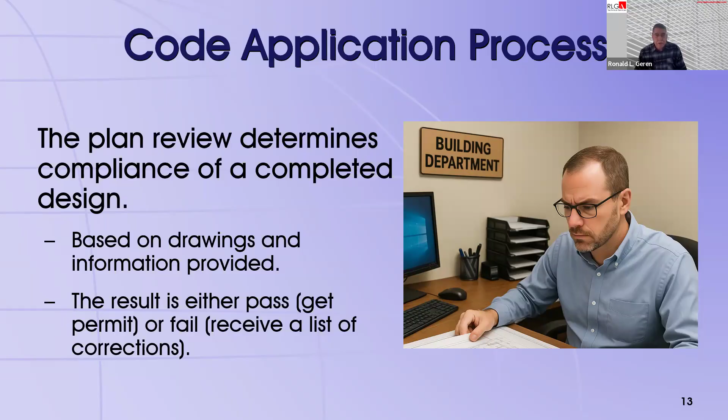So in this design process, the best solution is to create what I call a code compliance strategy. You're working off of minimal information. The only information that you really have, especially at the beginning of the project, is that programming document that the owner gave you. And in some cases, the additional service that you're required to provide for the owner is to develop that program for them.

So even then, you're starting with zero information at that point, other than you have a pretty good idea what the project is. From a macro perspective, you know it's either going to be an office building, a hospital, or a school, or whatever. So you have some general idea of what you're starting with. But you're really starting with minimal information. And then how that code applies really depends on the tactics that you as designers take along that process in order to address specific code issues; room sizes, materials, cost is going to affect that. So there's a lot of things that play into the code application process.

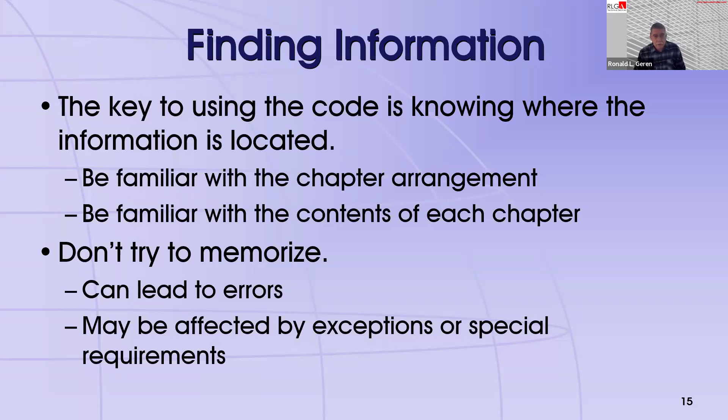Another thing to know is to understand your definitions. What you may think is a correct definition is not really what the building code thinks that definition is. So, for example, the word approved. If you ask somebody if something was approved, you would ask by whom? Is it the jurisdiction? Is it the architect? Is it the contractor? If the code says it has to be approved by somebody, who is that approving authority?

Well, if you go into the IBC and look up the definition of the word approved, it says acceptable to the building official. So if you want to use a product and the code says or any other approved material, it gives you a prescriptive requirement and then says any approved material. If you want to use something other than what the prescriptive material is, you have to go to the building official to get that approval.

Some jurisdictions like California and Florida have approval systems already in place, so you can go and take a look at their listing to see if something's already been approved for those particular jurisdictions. If not, then you'll have to go through the approval process. For those of us outside of California and Florida, where they have those, and I'm sure there's some other jurisdictions out there that have similar situations.

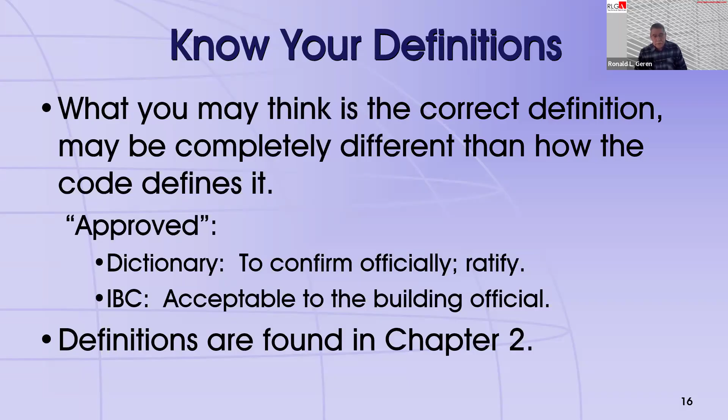Even the headers there for the four parts of the means of egress system. Means of egress is defined, and it's defined as being the exit access, the exit, the exit discharge, and the public way. And so each of those have various components, and each of those components are defined terms if they're italicized in that list. So anytime the IBC italicizes a word or a series of words, that means those are defined somewhere in Chapter 2.

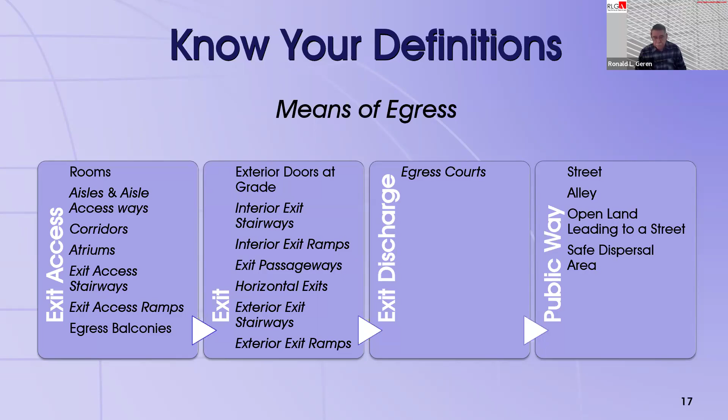So let's get into the step-by-step process. It's a 28-step process. I tried to make it a 12-step process when I first started, so I could say this is my 12-step process for code application for architects. And somebody told me it was a good thing I didn't do that, because all the 12-step organizations out there could have sued me for copyright. So it's a 28-step process.

Yes, it's a little bit daunting, but it's actually turned out to be necessary to have these individual steps. Schematic design almost includes 50% of them. And that's because there is so much that happens early on in the project design that you have to make some significant code decisions that affect the design later on. So many of these decisions that you make during schematic design, you want to make sure that you make them during schematic design, because if you hold off until design development, or even worse, construction documents, you may find yourself going back to the drawing board and redoing either the whole building or a good portion of the building.

And if you're hired to do programming, some of those steps can be done during the programming phase, just based off the programming areas that you're going to be given by your client. Design development has 8 steps within that, and those 8 steps get into more detail on the design itself, just like design development is intended to be. You want to start putting muscle and meat on the skeletal frame that we constructed in schematic design. And then construction documents has 7 steps, and it's basically detailing everything based on the selected material and construction type that you're building the building for.

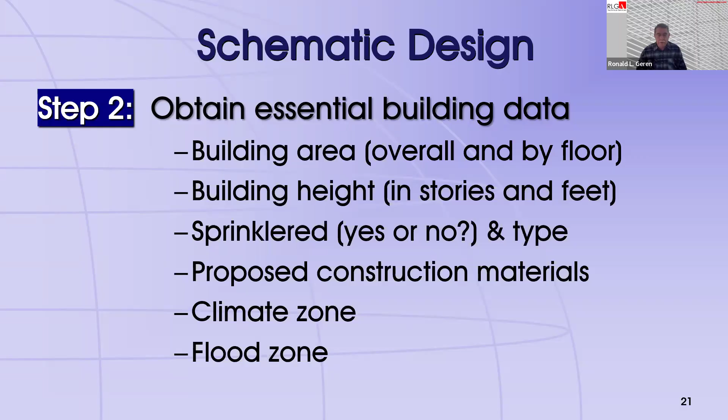Another consideration is what kind of materials do you want to use on the project? Are you going to be wood frame, concrete, whatever? Put some thoughts together, because that'll point you in the direction when we come to determining construction type. Then determine what your climate zone is, because that's going to dictate your building thermal envelope elements. And then your flood zone, whether or not you're in a floodplain, a 100-year floodplain. If you are, there are certain things you're going to have to do to address that flood elevation level.

The next step, based on that programming document, is to determine what the occupancy groups are. In most cases, buildings are going to be multiple occupancy. So you want to look at all elements of the building to determine what the various occupancy groups are going to be. Obviously there's probably going to be one major occupancy group, and in rare occasions you may have a single occupancy building, but in most cases buildings will have multiple occupancies. So look at Chapter 3 and go through that to determine what your occupancy groups are.

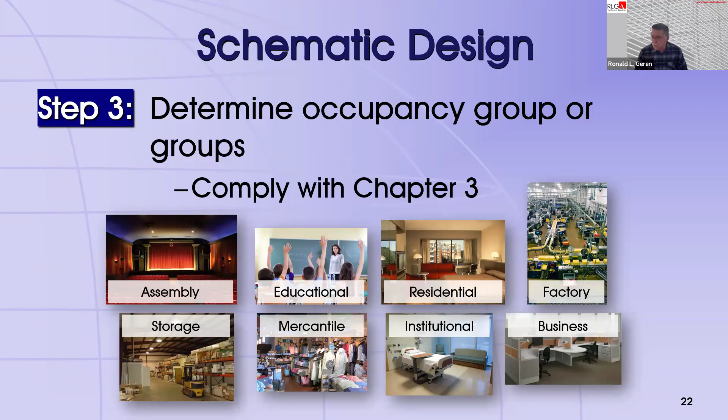Step 4 is to take a look at your construction type based on the materials you decided you want to build or design your building with. There are 5 construction types. Type 1 and 2 are considered non-combustible, while type 3, 4, and 5 are considered combustible. With each one of those comes certain fire resistant requirements for certain building elements, so you need to look at Chapter 6 regarding what type of fire resistance is required. The type of materials affects the allowable area and allowable height—or I should say the construction type will determine the building area and allowable height.

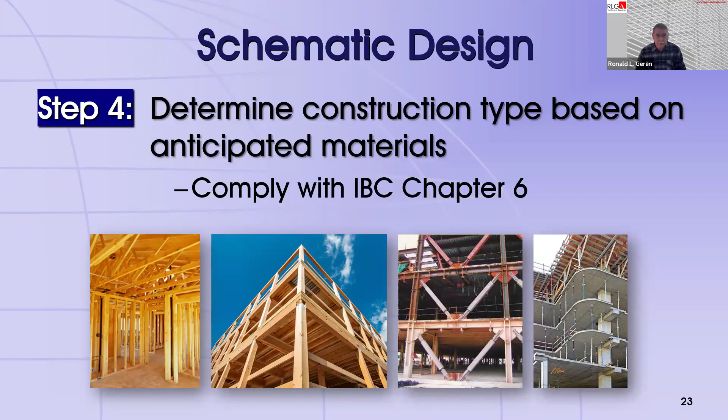Something to keep in mind is that under the 2021 IBC, they introduced 3 new Type 4 constructions for tall wood buildings. So those are new in the 2021 IBC.

Step 5 is to determine how mixed uses and occupancies will be handled. This is the situation I just talked about where most buildings are going to be what we call mixed use, with more than one occupancy group present in that building. How you handle that, you have options—this is part of your code compliance strategy. You can consider them accessory occupancies, provided they don't exceed more than 10% of the floor area in which they're located. That's the aggregate sum, not just 10% of one occupancy and 10% of another. You have to take all the accessory occupancies, total up the entire area of all of those, and if it's less than 10% of the floor area, you can call it an accessory occupancy with no separation. You still have to classify them according to their occupancy group, but they do not dictate allowable area or height.

Another option, if you can't call it an accessory occupancy, is to call it a non-separated occupancy. A non-separated occupancy means you have multiple occupancy groups, and table 508.4—I can't remember the exact number now—identifies what the required firewall or fire separation requirements are between occupancy groups. With a non-separated occupancy, you don't provide any separation between the occupancy groups, but everything is dictated by the occupancy group that is most restrictive in regards to height and area.

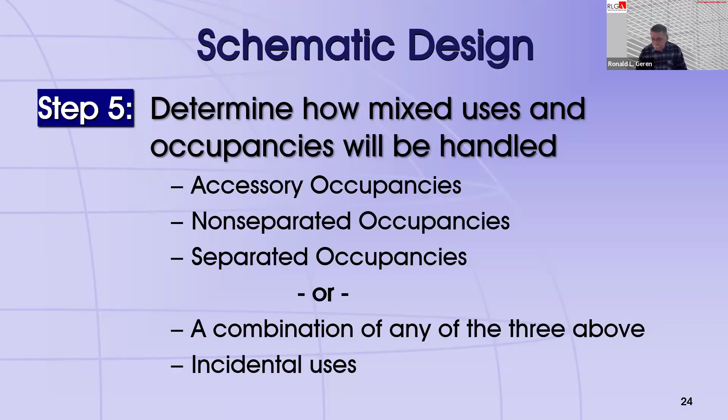So this is when I was talking about special uses. Even though you've classified the building under Chapter 3 for an occupancy group, in some cases you may have a building that is kind of unique within that occupancy group that you have to apply additional requirements to. Some of the more common ones are shown there, but I'm going to go through the entire list - it's actually 3 slides worth of special uses and occupancies addressed in this particular chapter.

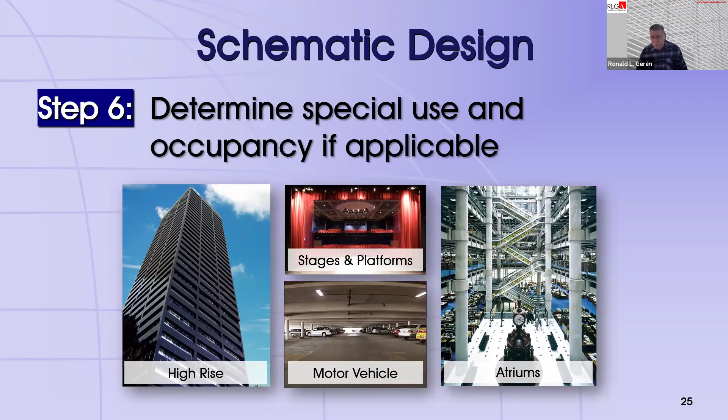So you got covered mall and open mall buildings, high-rise buildings, atriums - those things you'll probably run into on a rather regular occasion. Underground building is any building with the floor more than 30 feet below the grade plane. Motor vehicle related - this is your parking garages, open or enclosed parking garages, private garages, public garages, and then vehicle repair shops. Group I2, your hospitals. Group I3, your prisons and detainment centers.

Motion picture projection rooms - it's becoming less and less of a problem in this digital age, since most of our movie theaters are going digital rather than film. The problem was the cellulose film is very flammable, and you had a lot of fires - flammable film with projectors with high heat light bulbs, not a good combination. A lot of fires started in the projector rooms. And then stages, platforms, and technical production areas - the scaffolding and everything associated with production type facilities.

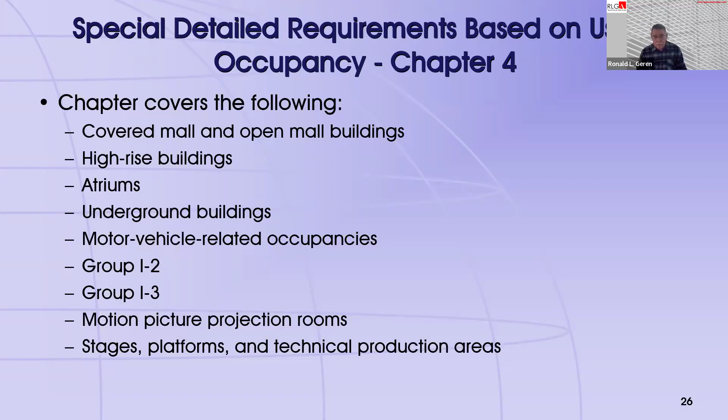Special amusement areas - this is where Disney lives in. Aircraft related occupancies, hangars, that type of thing, aircraft painting hangars. Combustible storage, hazardous materials - whether or not you're a Group H building or not, if you have combustible materials or hazardous materials, you still have to follow this particular section in Chapter 4.

And then the next one that gets into the Group H high hazard occupancy groups - spray application of flammable finishes, drying rooms, artificial decorative vegetation, which is kind of important if anybody's familiar with the Coconut Grove fire, I believe in Boston. That was all started because of decorative vegetation in the dance room.

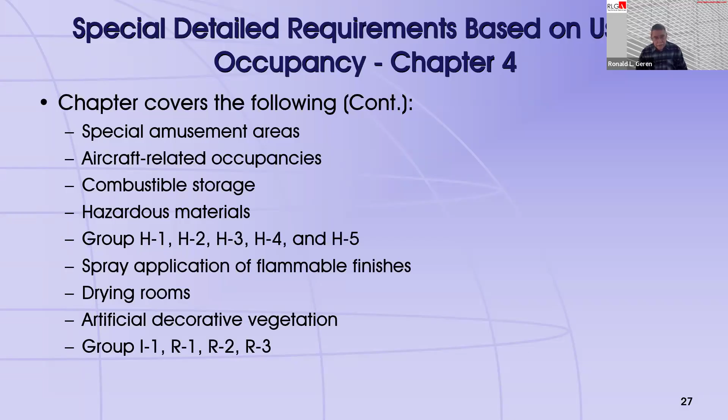And then special occupancies for residential - Group I1, which is your residential care homes, R1, R2, and R3 is your hotel motels, apartments, and single family detached or duplex dwelling units, respectively.

And then some things that you may or may not get into, these are getting less and less common - hydrogen fuel gas rooms, ambulatory care facilities you may run into on occasion, storm shelters especially if you're in the Midwest for tornadoes. Play structures used to be called children play structures - now we've got play structures for adults too, so they just took out the children. Hyperbaric facilities, combustible dust, grain processing - so it's mostly agricultural there. And then if you're into higher ed or healthcare, medical gas systems, and then higher education laboratories.

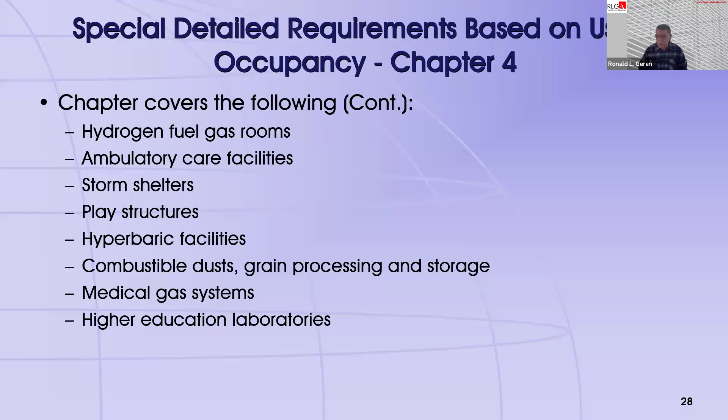A lot within that one single chapter.

Next step, step 7, is to determine your allowable height and area. This depends on whether you're doing a separation of occupancies, because you can separate occupancies by horizontal assembly and in the vertical instance. So if one occupancy allows you to go higher and another has a low story height, you separate it, put the low story height at the lower floors and continue up with the higher height occupancy group, separated by horizontal assembly. It really depends upon the separation of the occupancy.

Tables 504.3 and 504.4 talk about heights. One is based on stories, the other based on feet, and it's mostly dictated by construction type, but occupancy group also plays a factor. The allowable areas are what we call tabulated areas in 506.2. It used to be these were all congregated into a single table, 503, with the exception of heights in feet, and they separated these. It made a difference, but kind of did not, in my opinion.

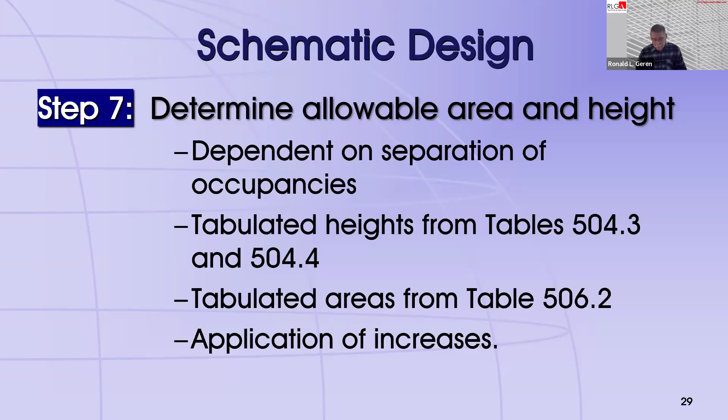So if you find yourself in a situation where you've gone through the whole process up to this point and your building either exceeds allowable height or exceeds allowable area, what are some things you can do? One option is to just go to a higher construction type. If you're type 5, go to 4 or 3, or maybe even jump to 2B, which is a non-fire resistance rated, non-combustible building. That'll give you more allowable area and height in some cases, so that may be enough of a jump to get you where you need to be.

Another option, if you don't want to go to a higher construction type, is to break your building up into smaller buildings using firewalls. Although each building separated by a firewall is treated separately in regards to area and height, the whole building is still considered a single building for purposes of electrical supply, power supply, and things like that.

Fire lines going into the building for the sprinkler systems, things like that. So it's still treated as a single building, but for purposes of height and area, it's multiple buildings.

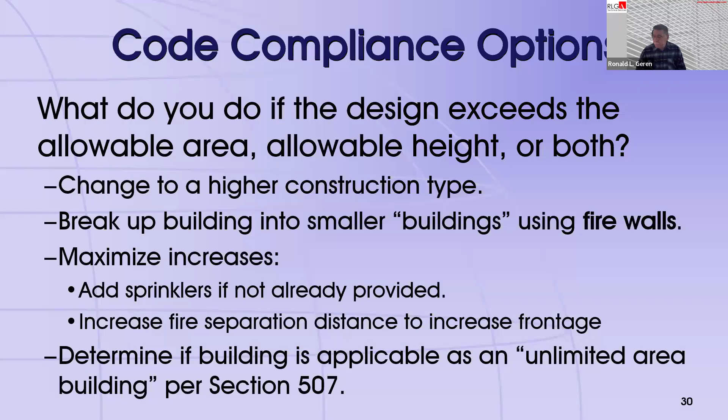Next step is to calculate your occupant load, and this is going to be based on your preliminary floor areas at this stage, unless you already have a floor plan. But if you don't, you can still calculate it based off the program areas and get a rough order of what your occupant load is going to be.

And then you're going to keep coming back and readdressing this over and over again as the design develops, and that may either tighten or increase. So you have to be very aware of what you're doing when you're manipulating spaces during the design process.

The reason why this is so important is because that number, whatever occupant load you come up with, is going to be used to determine the number of exits required for the building, what your exit width requirements are going to be, and the number of plumbing fixtures that you're going to have in that building.

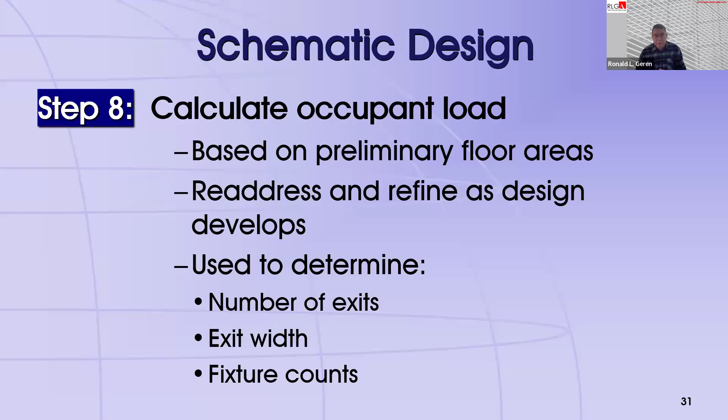Step 9 is to establish points of exit. Everything is—I tell my students this—2 exits, regardless. Provide me 2 exits. Then you have to take a look at the table to see if you need to go higher. Most buildings, unless it's an assembly building, are probably going to be less than 500 occupants per story, and all you need is 2 exits.

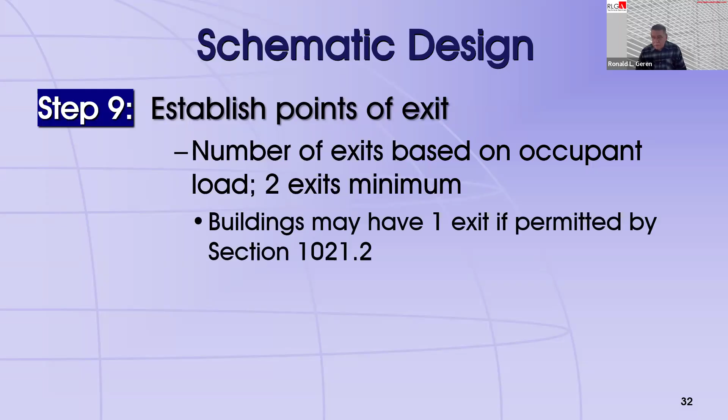Anything higher than that, 501 to 1,000, you're required to have 3 exits, and anything over 1,000, 4 exits. You may be permitted 1 exit if permitted by section 1021.2.

When you're required to have at least 2 or more exits, at least 2 of those exits have to be separated by 1/2 the overall diagonal if it's unsprinklered, or 1/3 the overall diagonal of that area being egressed for a sprinkler system. So 1/2 the overall diagonal of that space non-sprinklered, 1/3 the overall diagonal for buildings that are sprinklered. That's the separation between at least 2 exits. Not all 3 or all 4 exits have to be separated by that distance, but at least 2 of them do.

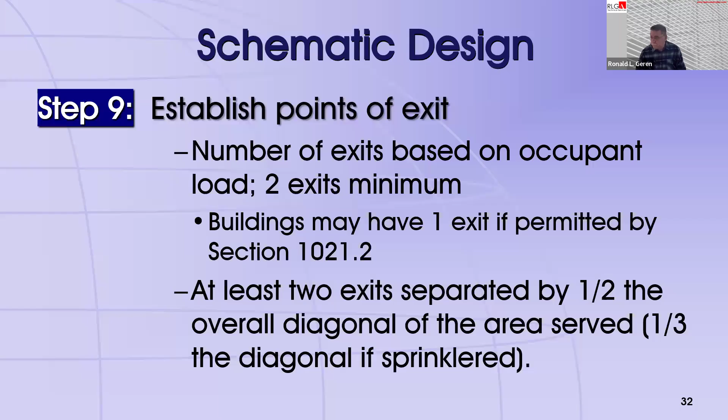Next is to check your egress pathways. So now you've got your building layout, you've identified where your exits are. You want to make sure that your pathways to those exits meet certain requirements. So you want to look for what the travel distances are. Measure from the most remote point in each room to an exit, and that distance must be less than or equal to the travel distance allowed by the code. That's all in Chapter 10.

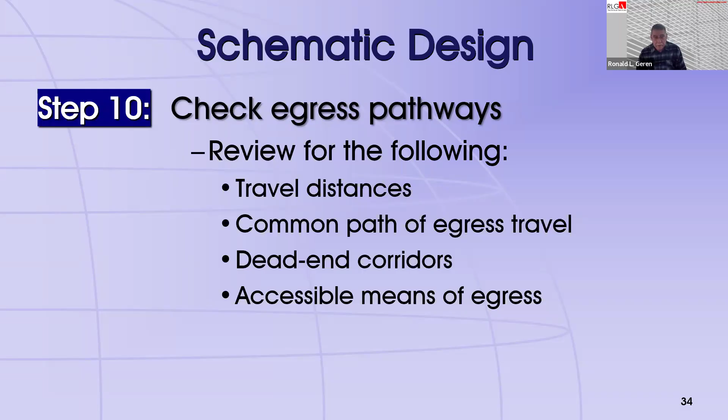So the exit access is where the pathways are, and this kind of starts in the room. In most cases, there may be certain open stairs, or unenclosed exit access stairs, that go between the second and third floor but don't continue all the way down to the ground. Those are considered exit access stairs; they cannot be called exits. Egress balconies, balconies on the outside, like if you're familiar with a lot of motels where the entrances are on the outside and you've got those balconies that connect all the doorways. Some apartment complexes are like that as well.

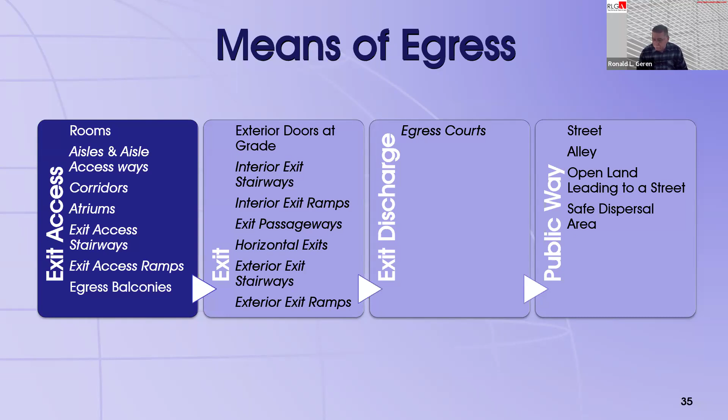So travel distance and measuring from the most remote point - I didn't want to get too technical, but I want to point this out because this is something I see frequently. The reason why we measure travel distance the way we do is because of this: most rooms are going to have a series of furnishings in it, so to go from the most remote point in that room to that doorway on the opposite corner, you're going to have to do a zigzag pattern through all the furnishings. You cannot do this. I see a lot of diagrams that come across my desk from architects wanting me to review their drawings, and I see this, and I tell them, no, you can't do that.

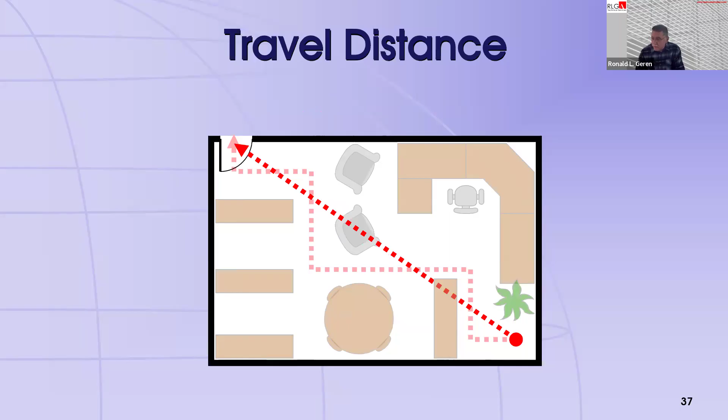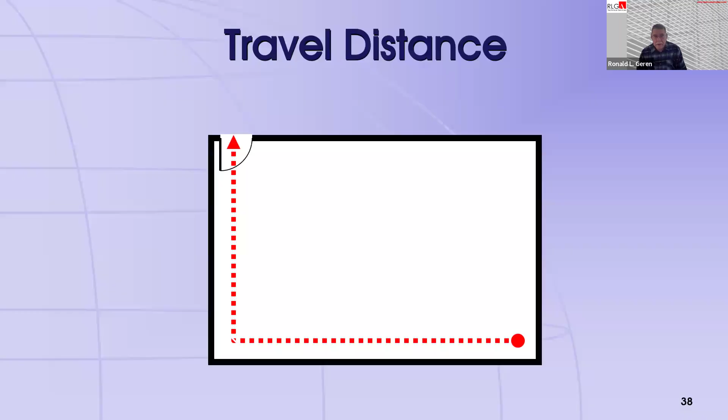If you took the dimension here and looked at that dimension there, that distance, it would be the same. So if you follow an orthogonal path to the exit, that'll maximize the travel distance to that particular exit access door or exit door.

Step 11, determine fixture counts. It could be very complex. I can speak for at least an hour, hour and a half on determining fixture counts. Again, this is going to be based on that occupant load that we calculated back in step 8. And this is going to be broken down by classification. They don't call it occupancy group anymore. It used to be under occupancy group.

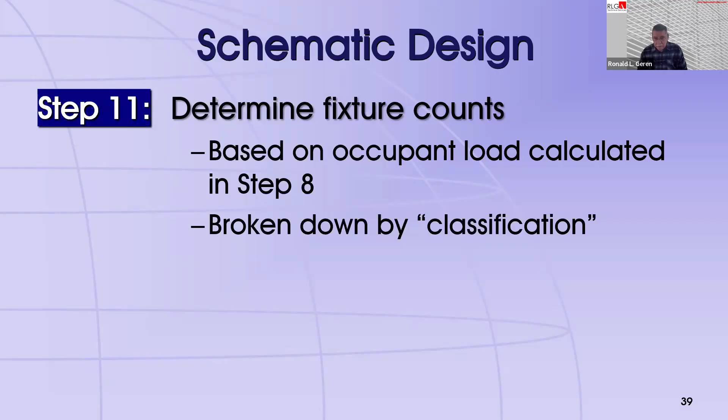So now you can kind of group certain areas of buildings, even though they may be classified as a certain occupancy group. You can put them together under a single classification and group them that way because they're all associated with that main occupancy or that main use, and just apply it as an umbrella calculation to cover the entire area. But those fixture counts, you have to deal with it 50-50, 50 male, 50 female, and you have to provide fixtures in accordance with the table.

They are allowing single use or single user toilet rooms grouped together for non-gender specific application. However, the total number of fixtures still have to add up to the requirement for male and female. So if you're required to have 4 water closets for males, 5 water closets for females, if you want to lump them together and make them non-gender specific, you have to provide 9 water closets that anybody can use. And they all be in individual toilet rooms, and then you can have congregate lavatories on the outside, same calculation, same number of fixtures based on both calculations.

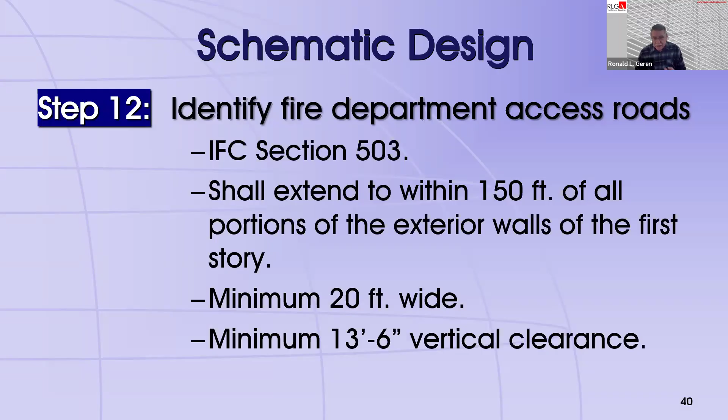Step 12 is identify your fire department access roads. Here you have to go to IFC section 503, so you have to look at the fire code. In this instance, if they adopted Appendix D of the IFC, then that gives you some further criteria about turnarounds and things like that. Otherwise, your fire department may have specific criteria in lieu of an Appendix D. The fire access road must be within 150 feet of all portions of the exterior walls at the first floor. The road must be at least 20 feet wide and have a 13-foot, 6-inch vertical clearance.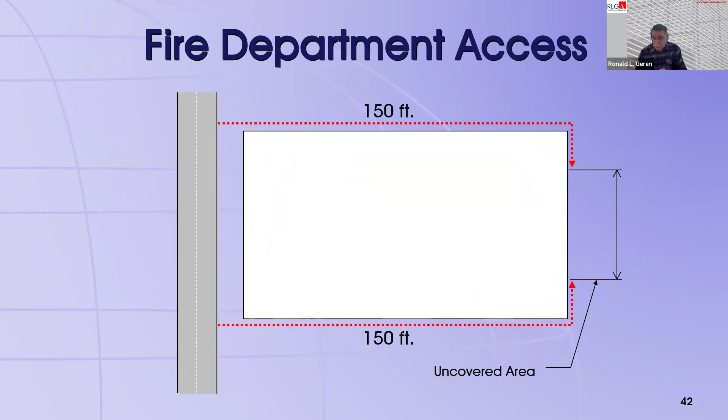So when we say 150 feet from the fire lane, this is not what we're talking about. Draw an arc, yeah, everything's within 150 feet. No, this is what they mean. You have to go from the road around the perimeter. And if you go around and find yourself short, you're going to have to make that up with a fire lane. And you can do that by increasing the fire lane, adding a fire lane to cover the gap, or put a fire lane all the way around.

Another way to increase this is to add a sprinkler system. If you add a sprinkler system, there is an option that the code official can increase the distance around the perimeter from 150 feet. In some jurisdictions, they'll double that. Some jurisdictions, they'll just give you 50 additional feet, so it's 200 feet. That may be enough. So find out what the building official is willing to extend that to if you have a sprinkler system.

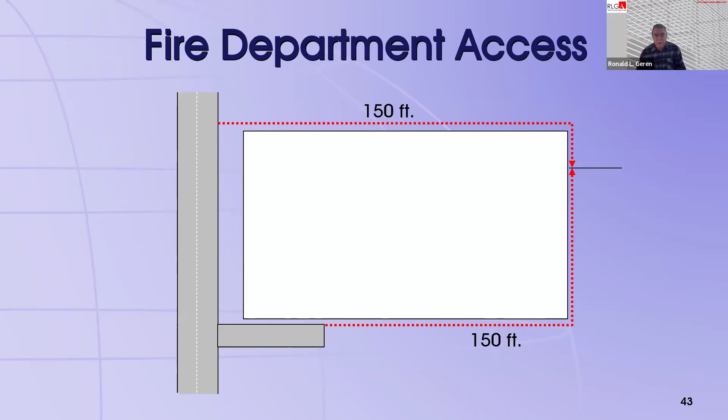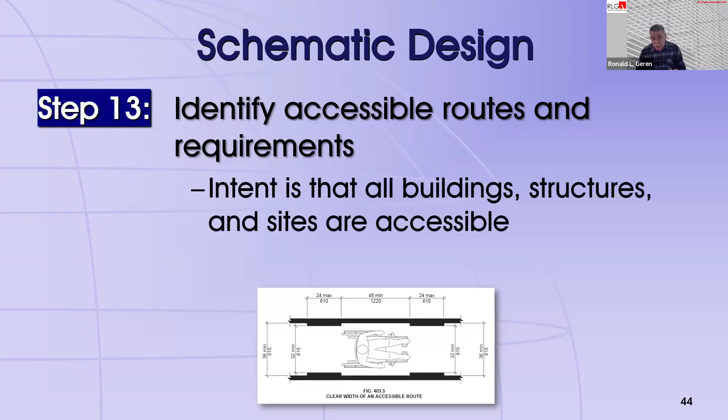Step 13 is now look at your accessible routes. And this is not accessible means of egress. This is accessible routes for users coming into and using your building, going to all areas of the building that are required to be accessible. It is the intent that all buildings, structures, and sites are required to be accessible, and you need to follow ICC ANSI standard A117.1.

If you're in the 21 IBC or later, you're under the 2017 edition of the ANSI standard. Prior to that is the 2009 edition. The 2017 edition goes above and beyond the ADA, so you have to be aware of that. If you're still just following the ADA, you will not be following the building code in regards to accessibility if you're using the 21 or the 24 IBC.

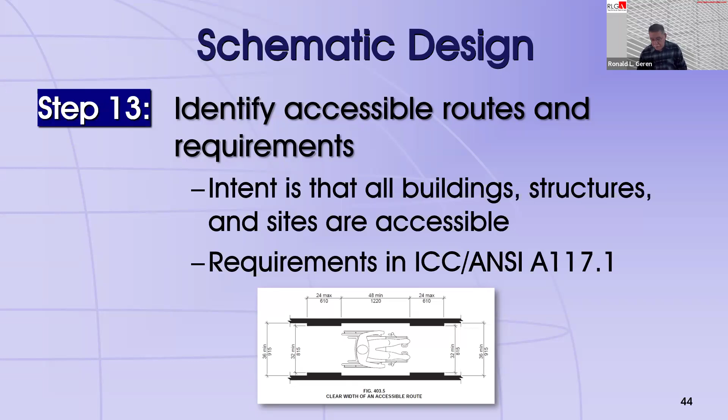Here's kind of a chronological history of accessibility. It first started off with the Architectural Barriers Act in 1968, which applied to only government facilities. That was followed by the Uniform Federal Accessibility Standard in 1984. This basically gave criteria that federal buildings need to follow in order to comply with the ABA. So it took 20 years to come up with a standard. And then in 1990, the ADA was passed that required everybody else to comply with the accessibility standards.

And shortly thereafter, they came out with the ADAAG, the accessibility guidelines. And that had not changed until 2004, when they combined the ADA and the ABA guidelines and made them more in line with one another.

However, after 2004, it took the Justice Department another 6 years to come up with the 2010 ADA Standards to implement those 2004 revisions. And then the ANSI A117.1, which I just mentioned, the 2009 and 2017 editions. The 2009 edition of the ANSI standard follows very closely with the 2010 ADA Standards. There are differences. So if you've got vertical grab bars, you're required to have those under the ANSI standards. You're not required to have them in the ADA.